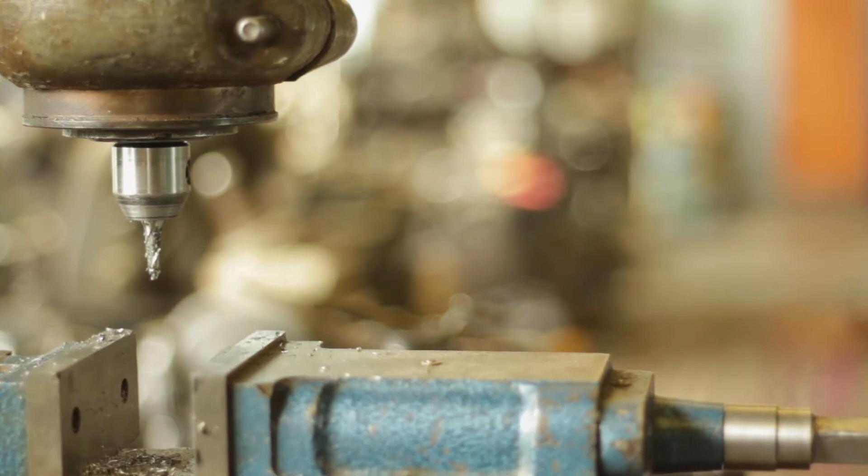And yeah, it's great. We share equipment, space, and knowledge. Being able to collaborate and work with like-minded people, I think that's when good things happen. Everyone's able to feed off each other's creativity and ideas. I think it's also encouraging to work with people doing similar stuff. It inspires me when I'm working with others to continue with my own work.

For me, what I value absolutely the most is the knowledge of the other people that I share the space with. The 2 more experienced builders, Levi of Legacy Frameworks and Michael Catano of Humble Frameworks, are really great instructors and teachers and mentors. I'll be working on a frame for friends, and they just have a way of noticing when maybe I'm starting to go astray, or just kind of walk over, see how I'm doing, and guide me. On a grander scale, that's what's most valuable for me.

But then on another level, there's literally the sharing of equipment and space. For me to set this up on my own would cost tens of thousands of dollars, which honestly, I'm able to just rent a bench and join a space that's already set up.

So each builder has their own process. The way I like to approach it is working off of a full-scale blueprint. The benefits of a custom bike is you can get custom geometry. Each person is unique, and custom geometry essentially allows you to tailor the bike to that person's needs, whether they're looking for comfort or power, but ideally you find the sweet spot between both.

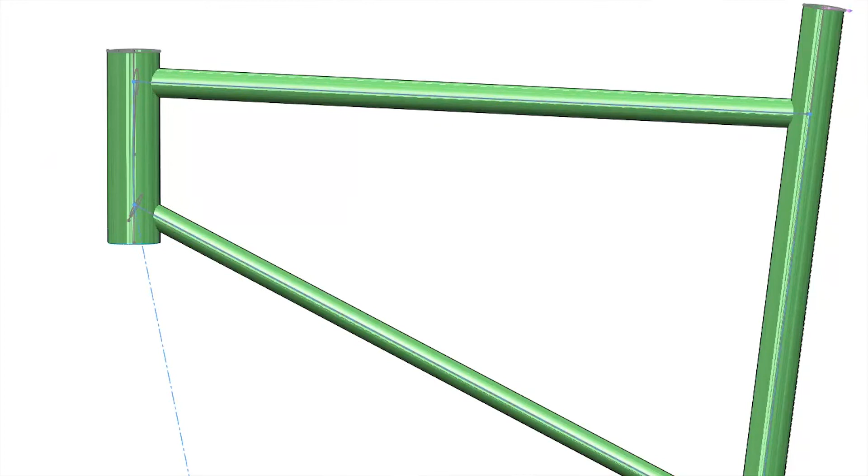My process is I'll start with a fit bike, which is a fully adjustable stationary bicycle, which we use to find the ideal geometry for the customer. Working from that, I'll then go into SolidWorks and take all my measurements and notes and apply it to a CAD file that I have set up. Basically, that CAD file I will then use to figure out the geometry.

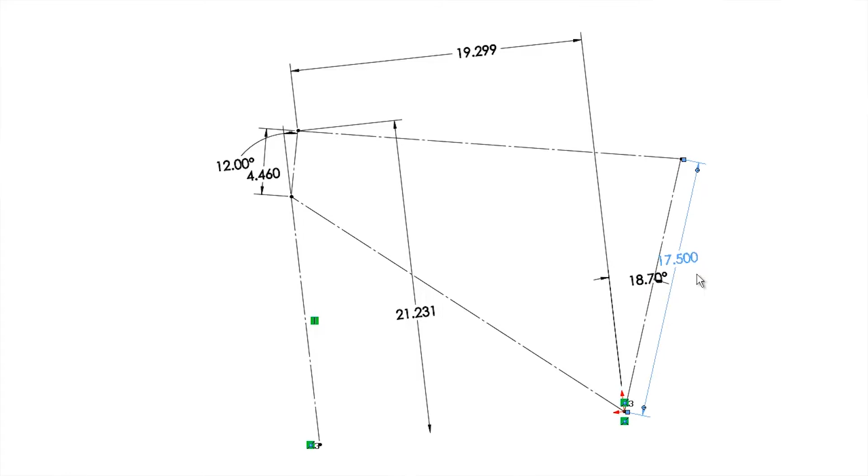There is more to it than just taking measurements and putting it in CAD. Once you're in CAD, you kind of see the effects that the geometry has on, for example, the wheel placements, how the bike might handle. Things you want to check out in CAD too, like pedal clearance — if the front wheel is turning and your pedal's in the forward motion, you want to make sure there's clearance there so the wheel doesn't hit.

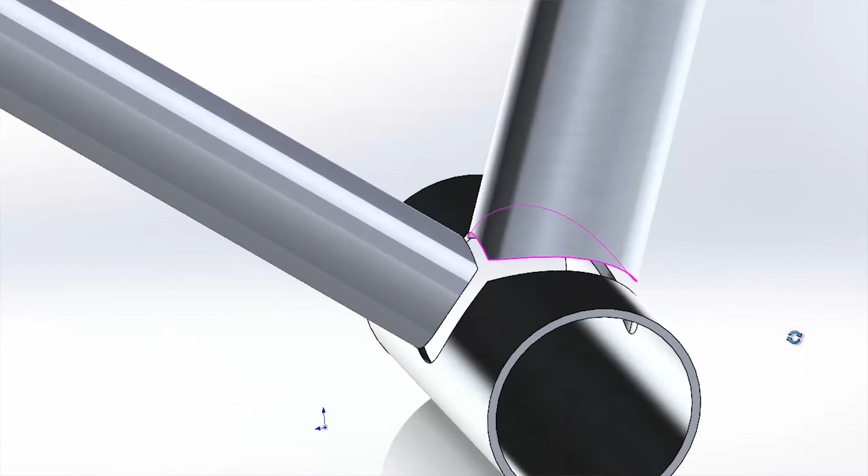And then from CAD, what I'll do is export a drawing, or actually several drawings, which are then printed full scale, which I'll use as my blueprint for my build. So when I'm actually physically building the bike, I have a full scale drawing on a surface table, and I use that to guide my measurements for cutting and joining the tubing together.

Technology is making it really easy for people to do stuff on their own. In the past, 3D printing didn't exist, or it was really only for the most premium of shops, or like a CNC, for example. Access to a full machine shop was very rare and cost a lot of money to produce things, whereas now you can, with desktop printers, and I feel like that's a trend in general.

There's a lot of shop equipment that's moving to a desktop, so anything from a small CNC machine to laser cutters. One of the tools that I use that's really basic is a vinyl cutter, which is basically like a digital X-Acto knife. I feel like a lot of these technologies are just allowing them to get smaller and more accessible for people. And then of course with the internet, people being able to market whatever idea they have and share it with others, it's just a lot of power at our fingertips.

So I think it only makes sense that it's all pointing in this direction of everyone working together in these shared spaces with this shared technology and equipment.